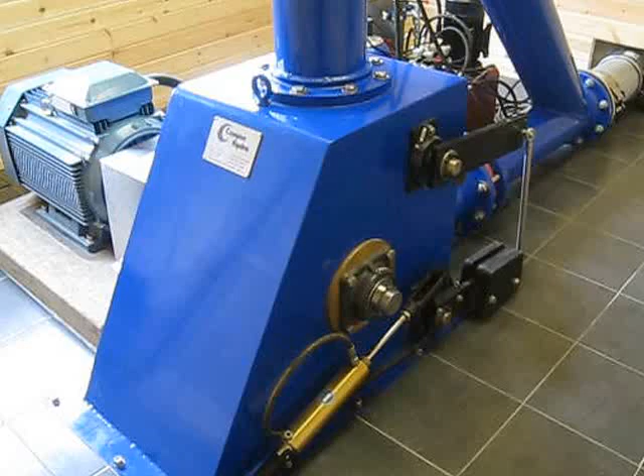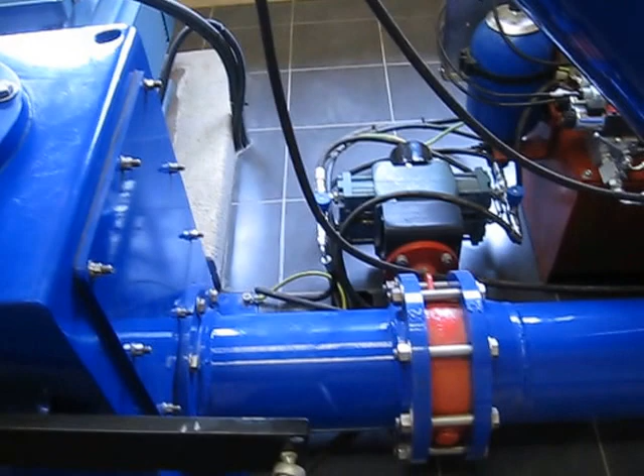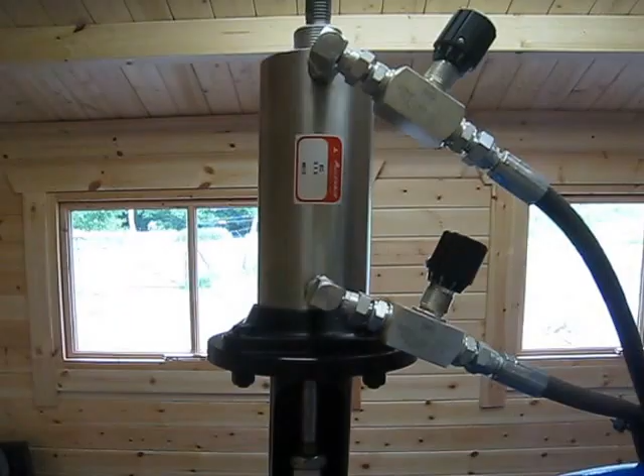This is Compact Hydro. It's a twin jet Pelton turbine. The bottom jet or nozzle is either on or off, controlled with a butterfly valve, and the upper jet is variable. It's a spear valve, so it's infinitely variable. They're all controlled by hydraulics, and here we have the deflector system, which is fail-safe, so we never get a runaway situation.

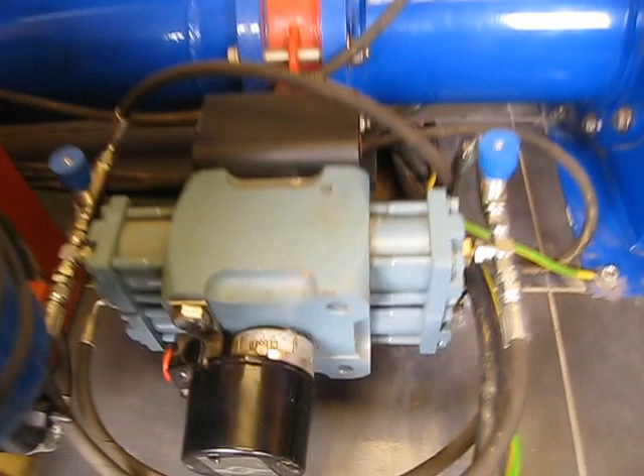Induction motor used as a generator, which makes things cheap. And there's the close-up, really pleased with this system here. This is the actuator for the butterfly valve. It's lovely and slow and controllable. It's a four-pot hydraulic rack and pinion, and it works great. And it's all on fail-safe hydraulics, so it shuts down if there's a problem.

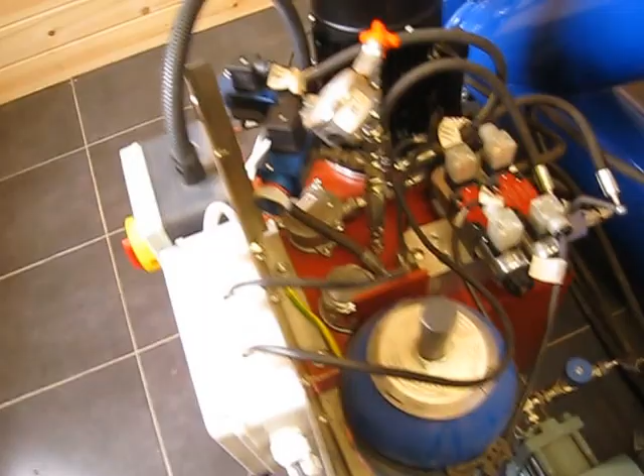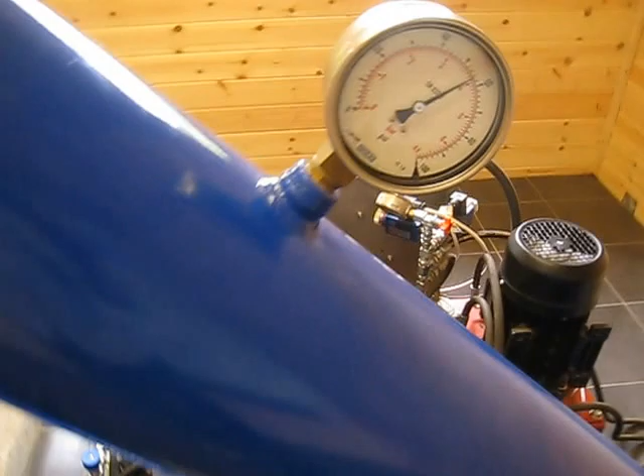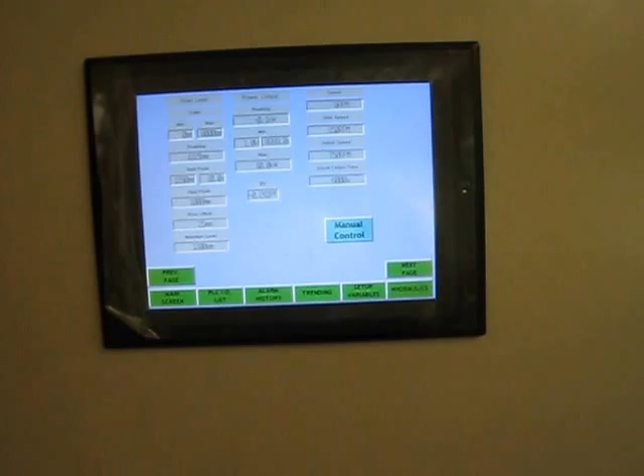We've got about 39 meters of head. We're waiting for water because it's midsummer here, so a little bit short of water. So I'll fiddle the control system, and we can probably make it go by altering the reading alarm. There we go, 10 seconds start. It should lift the deflector and start the system.

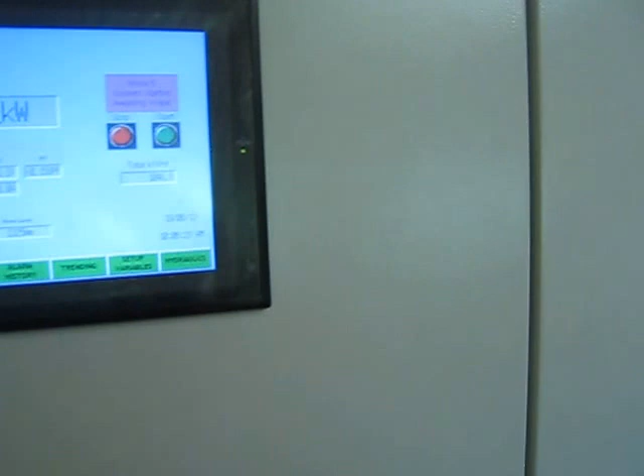Everything should be ready to go now. I've got this. I'll wait till... there we go. Cool, so that's the deflector.

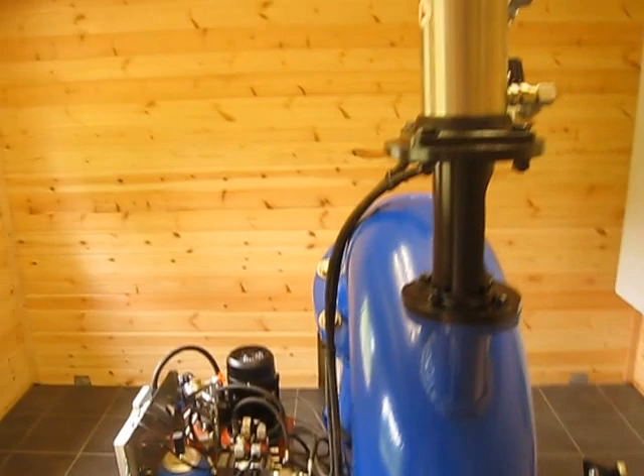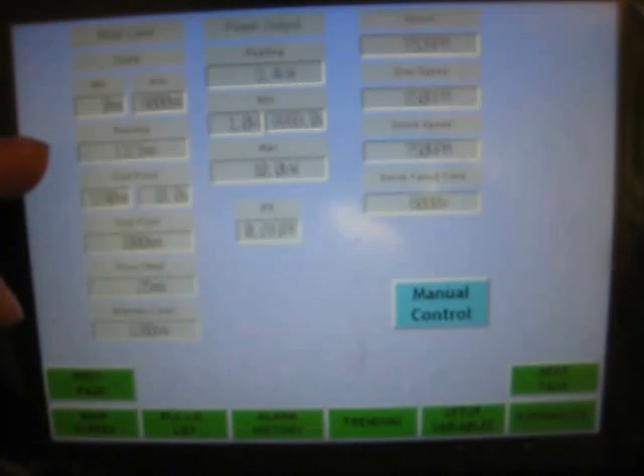It's now online and starting to generate. You should see the spear valve starting to jack up once it's happy. Look, we're now generating, and you'll see on the screen the target level is 1200. We've got 1300 in the dam, and I reduced the start level lower just temporarily to show us this machine working.

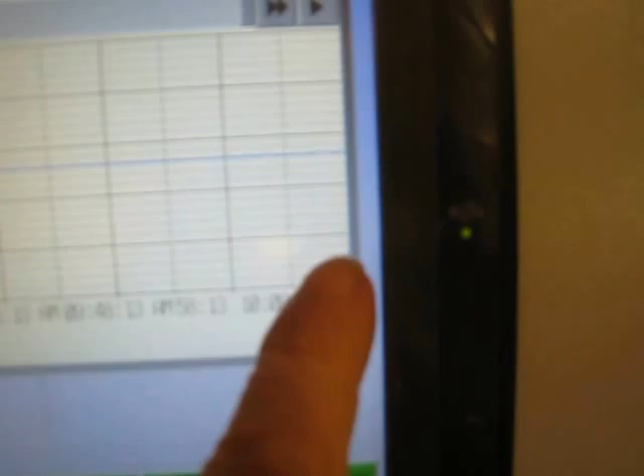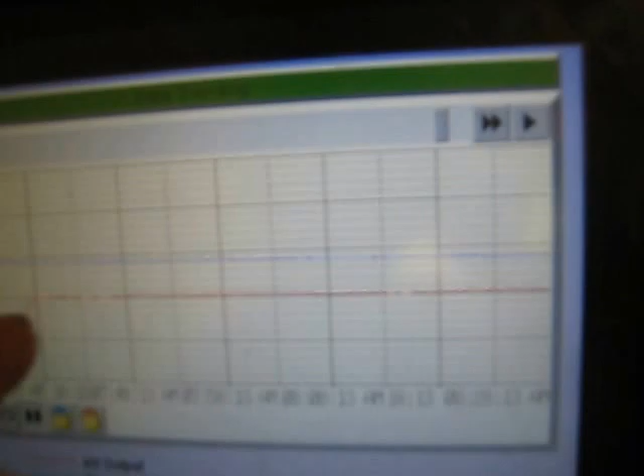And you can look at the trending, and you'll see the water level has been slowly rising, and then we should see the power come on here in a minute. You can look back at the history, see the previous generation, which was it turning on when it had sufficient water, ramped up to just 10 kilowatts because it knows it's not got enough water to go any higher than that. It ran along, and you can see the blue line descending.

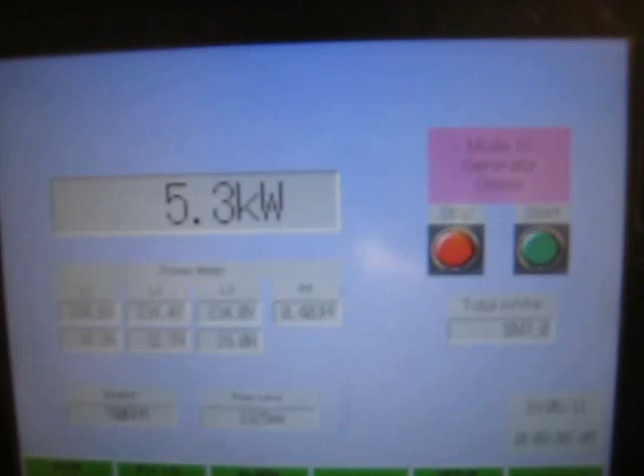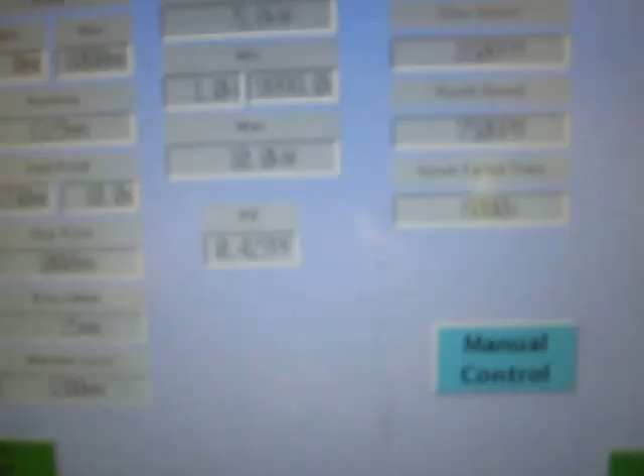It's realised it's short of water, and said, that's it, I'm not maintaining a minimum level, as the blue line went down, and then the machine's turned off and the level's slowly risen back up again to today, and today we'll see that ramp back up again, and it's doing 5 kilowatts now. It'll just be jacking up to 10 kilowatts at the moment because of the shortage of water. As soon as we get out of our midsummer season, I'll jack that back up to its 22 kilowatts, and hopefully the automatic system will just keep it running.

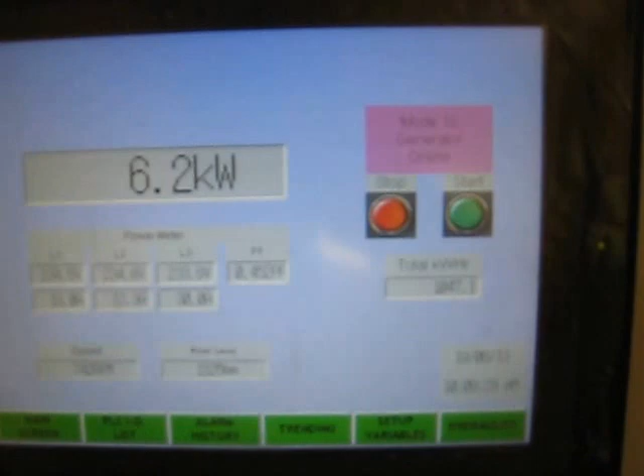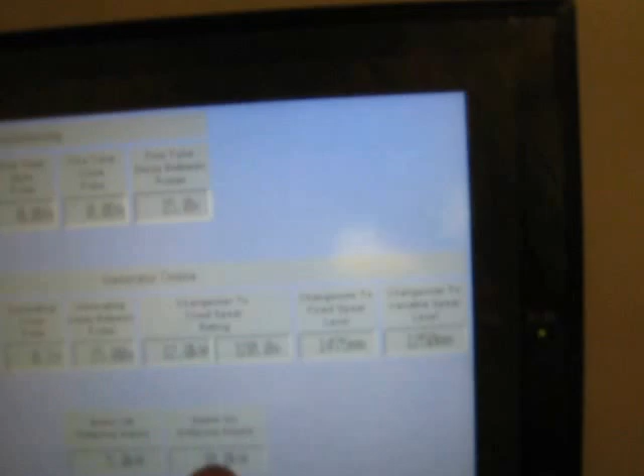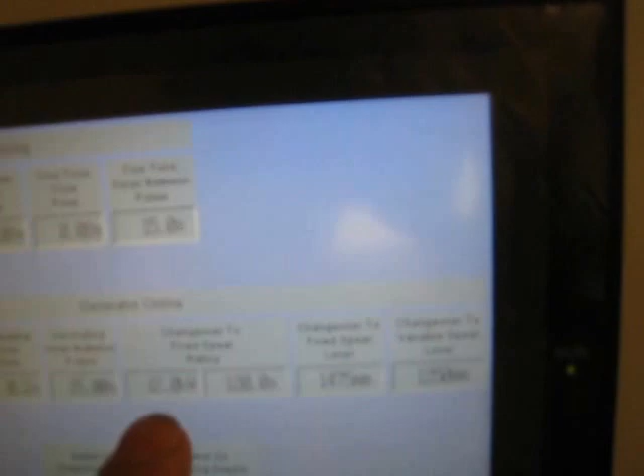I'm pretty pleased with that control system. You can look at the different things that are online at the moment, various alarms, as well as most of yesterday as we were doing testing, trending. Once it's been above 1475 millimeters for 120 seconds, and above 12 kilowatts, it will change over to the butterfly valve and then jack it open with the other valve to full power. And it's just sitting at 7 at the moment.

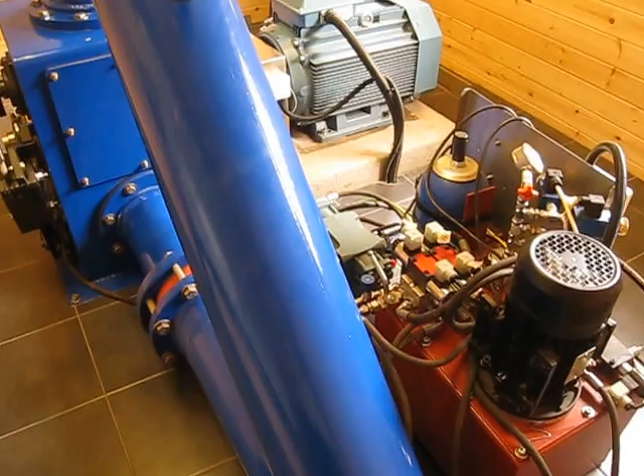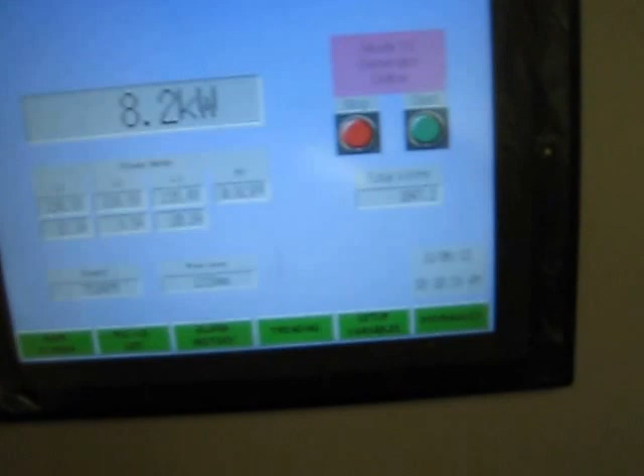Various clicks from the control panel there, which are the capacitors coming online, because remember this is an induction motor used as a generator, so we drop on capacitors as the power goes up to correct the power factor. They seem to be running reasonably good power factor. What is it just now? Power factor 0.95, no sorry, 0.92. It's not brilliant, but it'll do, it's quite a low output.

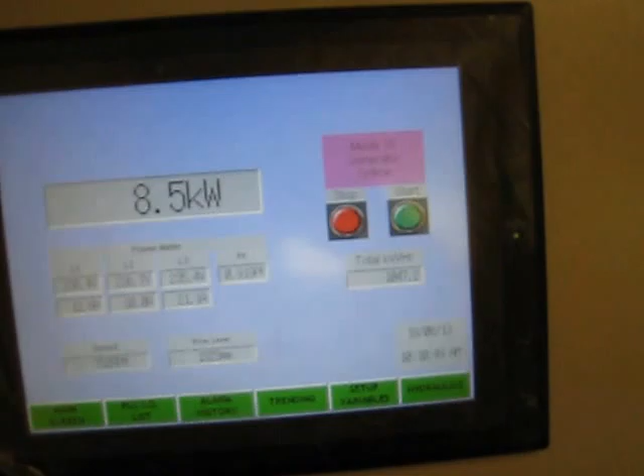Hopefully in the winter we'll just crank up to full output and it'll be sitting there for weeks on end, because we've got quite a good river here. Just virtually no head loss. Very pleased with that.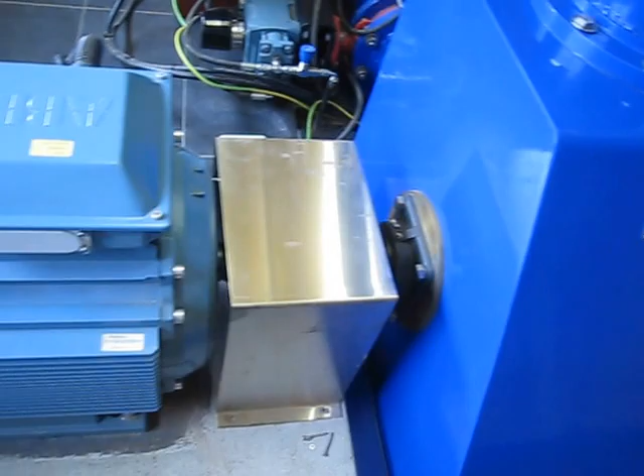10 kilowatts, there you go. That has reached its target now. Because of the shortage of water, it's only going to go to 10 kilowatts. I'll show you how much water's coming out of the tail race. It's brilliant, it's not a lot of water, it's quite efficient.

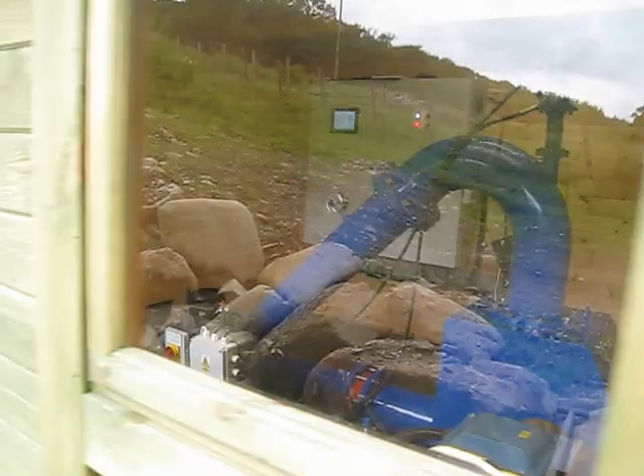Got a cooling fan in the roof. It's the garden shed really. Up the hill you can see the pipeline coming down the hill and the inlet valves and things. Quite pleased with the way it's all worked out actually. Yeah, small thrust block. It's really quiet, you can hardly tell it's working. Very pleased.